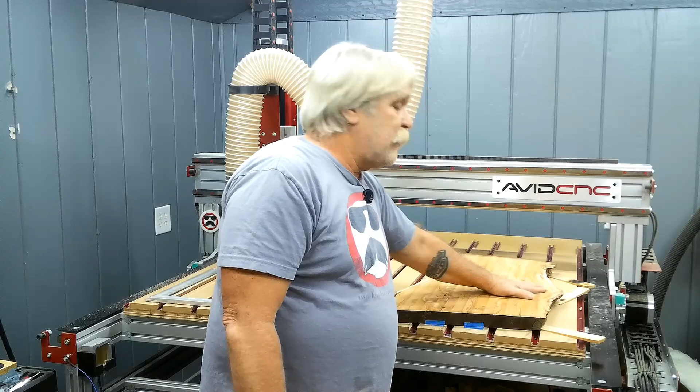Hey y'all! This video is part 2 of my mini-series on surfacing this Douglas Fir slab on my Avid 4848 Pro CNC router. In the last video, we flattened this side to get a nice even surface. And I did that manually using MDI commands and incremental jogging to get this surfaced nice and flat.

In this video, we're going to flip this piece over and we're going to create a toolpath to machine this slab down to its final thickness. We'll be creating two toolpaths. One will set to the material surface and the other will set to the machine bed.

Now, before I can go inside and start calculating the toolpath, I need to find out how thick this piece of material is right now, the way it's mounted to this spoilboard. Keep in mind that we used these shims to steady this piece of material as it had developed a cup in it. So I'll need to measure its thickness as it sits right now, then flip it over and mount it so I can machine it.

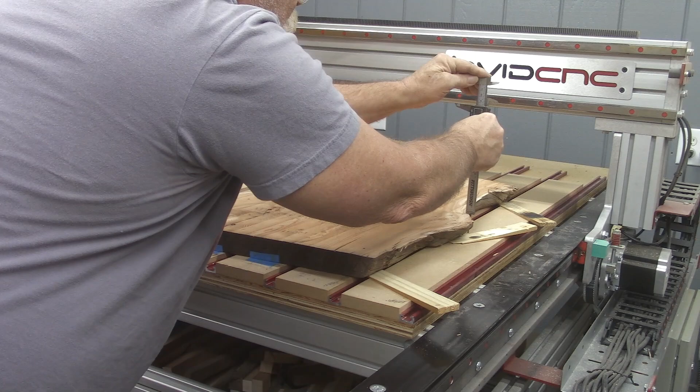Here in the software, we'll need to go ahead and create a new file. Now, before I do that, let me say that even though I'm demonstrating this in Aspire version 11.5, this works identically in Cut2D and VCarve, both desktop and Pro. So we'll go ahead and we'll create a new file. Now, I've already done this once before, so my measurements are already in my job setup form.

If you remember that slab, it has an odd shape to it. The widest part of that slab is 17.5 inches wide in X. However, because of that strange shape and some protrusions hanging out to either side of the slab, I'm going to go ahead and make it 19 inches wide. That way it'll cover the entire slab. It is almost but not quite 31 inches long, so I went ahead and entered 31 inches as the height in Y.

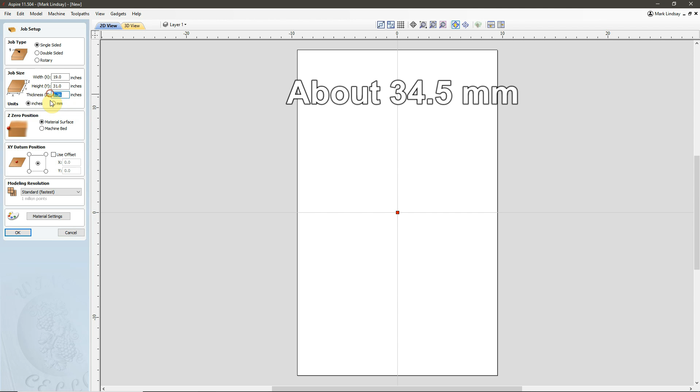For my thickness, after I flattened the first side, I took a measurement and I came up with 1.36 inches thick. So we'll enter that as our material thickness. For the Z0 position, I'm going to show you two ways of doing this, and I will use both toolpaths when we get out on the machine and I demonstrate this. For the first demonstration, I'm going to set my Z0 to the material surface. For the second demonstration, I'll set it for the machine bed. More on this in a couple of minutes.

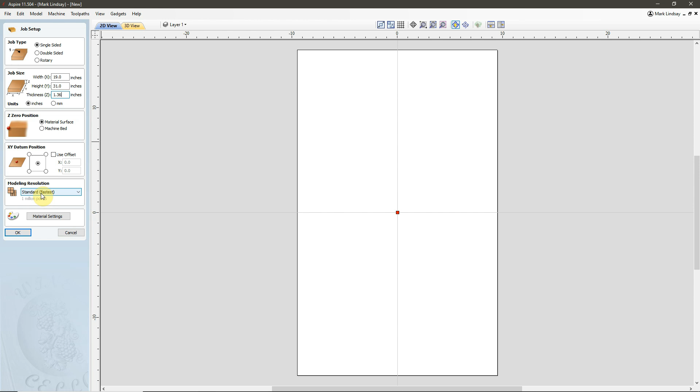I'm going to set my XY datum to the center of the material. Modeling resolution will stay at standard because there are no 3D components in this project at all. We'll click OK. Now, the first thing I'm going to want to do is create a vector that my toolpath is going to follow when we surface this material. So I'll come up here to draw a rectangle, and I want to use the center of this rectangle as my anchor point, and I want the center anchored to my X0, Y0, right here in the middle.

I want square corners, and for my width, I want the bit to come off about 1/2 inch from each side. So the way I'm going to determine the width of this rectangle is I'm going to come up here and highlight whatever value is in my X blank, and I'm going to type in X plus 1, which is the width of my material in X that I just put into job setup, plus 1 inch. And then I'll tap the equals button on my keyboard, and that gives me the width of my rectangle in X.

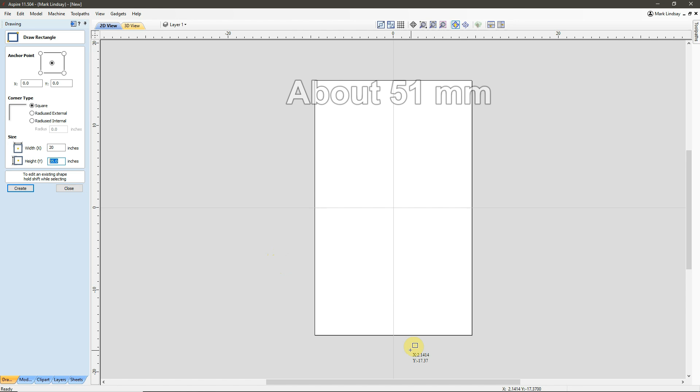For my height in Y, the material is just shy of 31 inches. Now, my surfacing bit has a 2-inch cutting diameter, and I want that bit to come off of the front edge of the material and off of the back edge of the material, the diameter of my bit, because I want all the X moves to happen out here off of the material. That leaves a smoother surface. So, for my height in Y, I'm going to say Y plus 4, because I want 2 inches up here and 2 inches down here. I'll click Create, and there is the vector that my toolpath is going to follow.

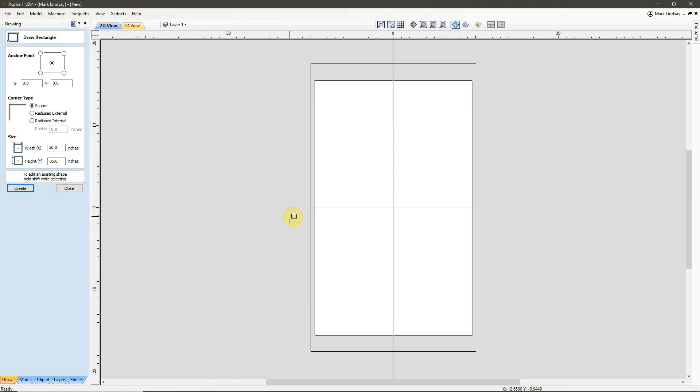I'll click Close. For this project, as I said, I'm going to show you 2 separate ways, so I'm going to create a second sheet identical to this one. For that, I'll come down here to my Sheets tab. If you have your tabs on the left side, the Sheets tab will be somewhere in this area. Now, a word about Sheets. Sheets were introduced in version 11.0. If you're using version 10.5 or earlier, you can't take advantage of Sheets. You will have to make a separate file for each one.

But because we have Sheets available to us, I'm going to create a new sheet. I'll just come down here and click Add New. And that has added a second sheet. And we can see here the name of the sheet is highlighted. The X measurements are identical, the Y measurements are identical, and the Z measurements are identical. For this second sheet, I'm going to use the machine bed as my Z0 position. So I'm going to go ahead and rename this now Machine Bed and hit Enter.

Then I'm going to come down and select Sheet 1, right-click, and I'm going to rename this Material Surface and hit Enter. Now I have 2 separate sheets that are identical in size.

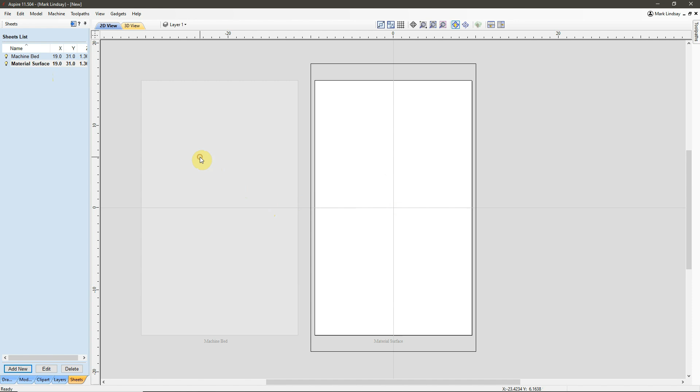Now that I have my machine bed material created, I'm going to come up here and select it so that it is active. Then I'll come down and I'll click Edit. And here I can make any changes up here should I need to, which I don't want to do in this case, but I'm going to set my Z0 position to the machine bed. And that will affect this sheet only.

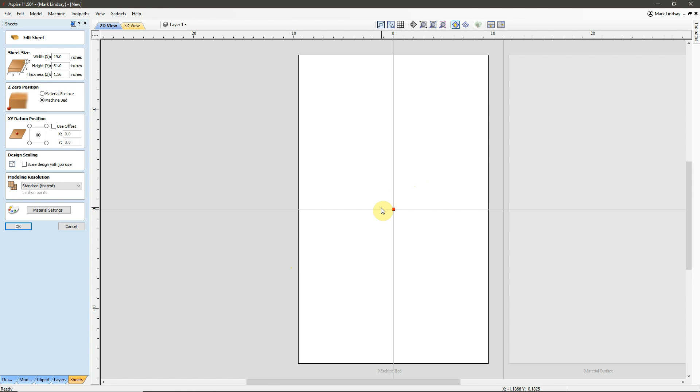Now again, if you're using version 10.5 or earlier, you can't take advantage of this. You will have to make a separate file. I'll click OK. And we now have our 2 sheets. One with the Z0 position set at the machine bed, and the other with the Z0 position set at the material surface. Now I'm going to come back over to my Drawing tab.

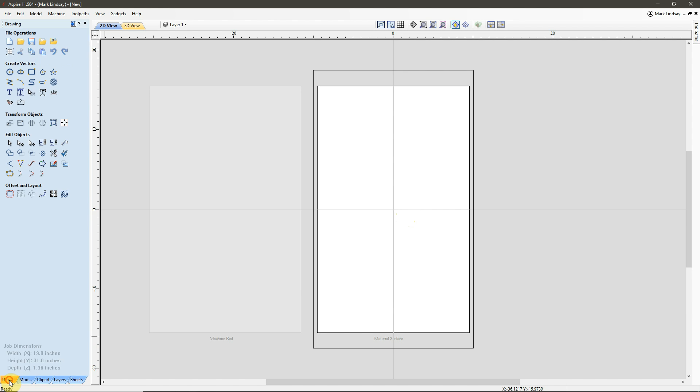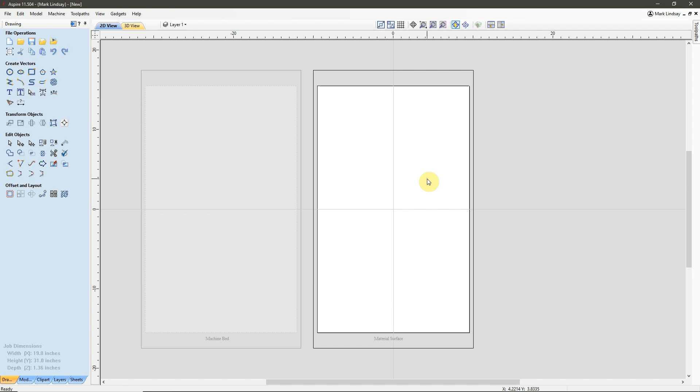I'm going to select this outside vector that we just created. Then I'll right-click, Copy to Sheet, Machine Bed. So now I have the same vector on both sheets. We're ready to calculate the toolpath. We'll head over to the Toolpath tab. I'll select the vector, and I want to select a pocket toolpath. So we'll come up here to Pocket.

Follow me on this. It's going to sound counterintuitive, but I will demonstrate what I'm doing when we get outside on the CNC router. For my start depth, for the material surface sheet, I'll enter 0. For a cut depth, I'll enter 0. I'm using my 2-inch Amana RC2255 bit. I want to use a raster machining strategy.

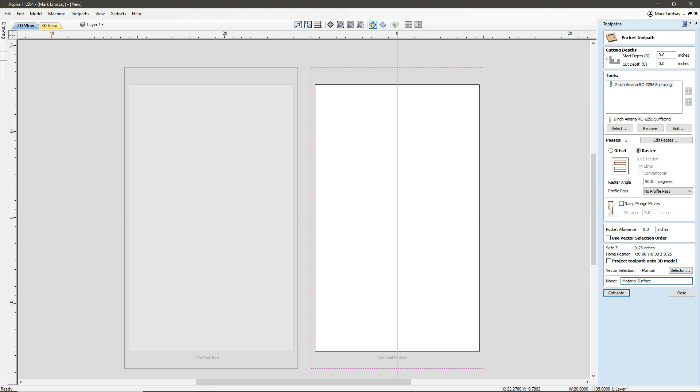If I just use a raster angle of 0, the bit's going to go back and forth from side to side along the X. I prefer to machine bottom to top, top to bottom along the Y. I have a raster angle of 90 degrees set. I also have my profile pass set to no profile pass. Now I'll come down here and name this Material Surface and calculate.

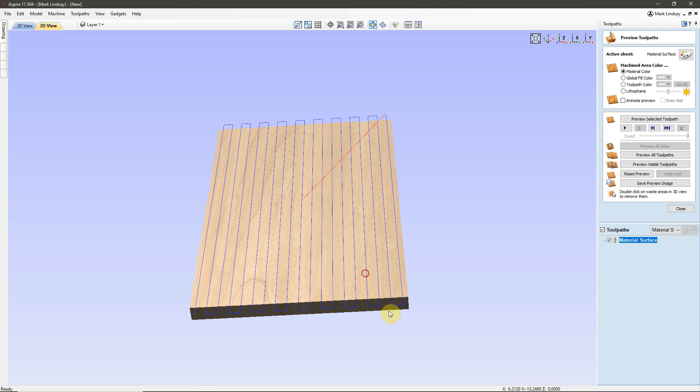Now, if we take a look, we'll see the bit will come from my XY0 up to this corner, then plunge down to the material surface, and then start moving back and forth, making its X moves out here off of the material, which is exactly what I want. I'm not going to preview it simply because you wouldn't see anything. All you would see is an animated preview of the tool moving back and forth. So I'm not going to bother previewing.

I'll just close this. And now I'm going to save this toolpath. So we'll come up here to save toolpath. And I'll save this visible toolpath to one file. Here's my bit. Here is the machine I'm using. Here is my post processor. I'll go ahead and save the toolpath.

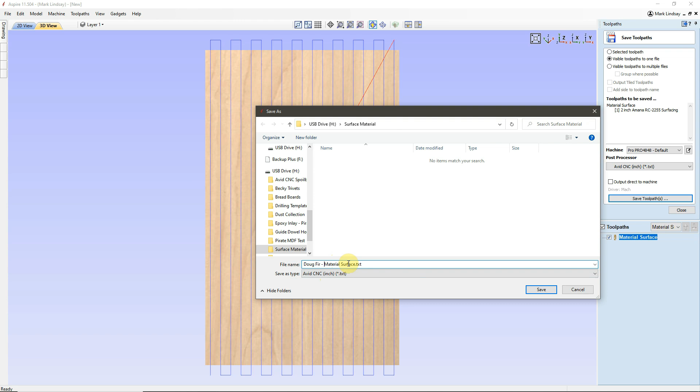I have my thumb drive installed in my computer, and what I'm going to do is rename this file. I'm going to call it Doug Fir Material Surface. That's letting me know that my Z0 position is the material surface. Then I'll click Save. So that one toolpath is finished.

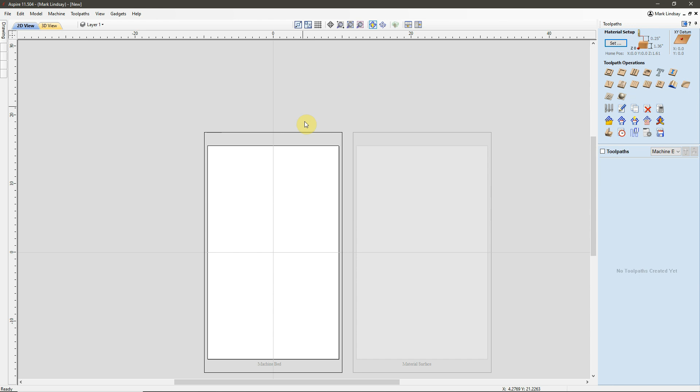We're done. Now I can uncheck it, close this, and now I can switch over to my other sheet, which is the machine bed. Out here in the 2D view, the machine bed sheet is active. I will select the vector, and I'll do the same thing. I'll come up here to the pocket toolpath. Now for this toolpath, I am going to need a cut depth. And I'm going to go slowly through this so you can follow the logic on how this is done.

My material thickness is approximately 1.36 inches. What I want is I want to end up with a thickness of about 1 1/8 inches, which is 1.125 inches. As we saw outside, the surface that I'm going to be machining with this toolpath is not flat. So that's about the thickest I think I'm going to be able to get out of this. It may end up being a little more, it may end up being a little bit less.

But the way I'm going to figure out my cut depth is I'm going to take what I believe to be the material thickness now. I'm going to enter 1.36. From here, I want to subtract the final thickness I want. So I'll subtract 1.125. Then I'll tap the equals button. And that gives me a cut depth of 0.235 inches. Take your actual thickness, subtract the final thickness you want, then tap equals. That is your cut depth.

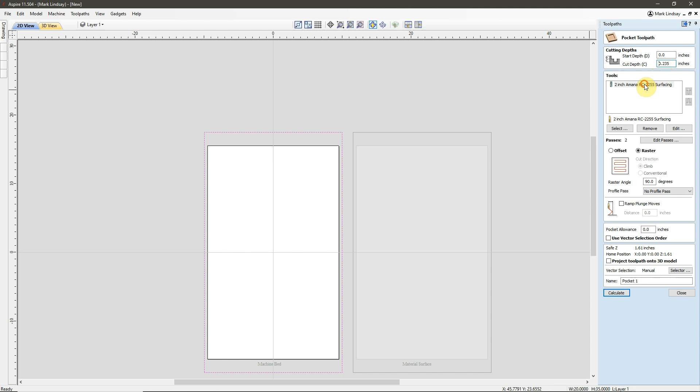Again, I'm using my Amana RC2255 surfacing bit. And the settings for this bit, if we come in here and take a look, the pass depth, as suggested by Amana, is 1/8 of an inch. I know that this tool is capable of cutting that depth with no issue. I also know that my machine is capable of cutting that depth with no issue.

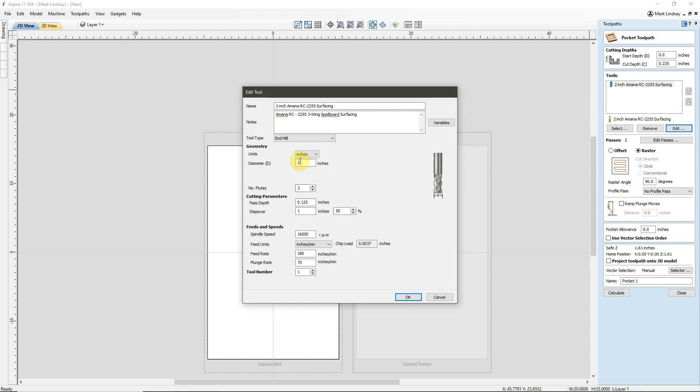But I want to be just a little bit gentler with this toolpath, because it's not a nice, flat, even surface with no defects. There are knots, there are surface defects that could get knocked loose and become a projectile if I try to be really aggressive with this.

So, as it sits right now, it's close enough to 1/4 of an inch of material I'm going to be removing. The software is setting this for 2 passes. Again, I don't want to be that aggressive. So I'm going to come over here and edit passes. And we can see it wants to take not quite 1/8 of an inch off per pass, but I want to reduce that. So I'll hit 3.

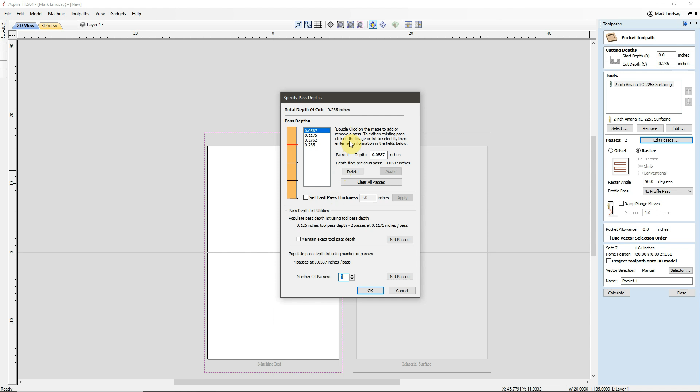Now I'll increase it to 4 passes. So it's going to be a little bit more gentle. Now, each pass isn't going to take very long, but I'll be able to kind of keep an eye on it and make sure nothing comes dislodged or I'm not shredding the edges off of this piece of material. I'll click OK, and we now see it's going to do this in 4 passes.

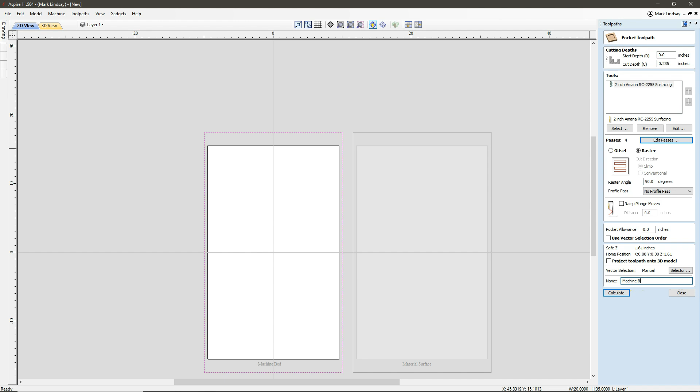Again, I'm going to use a raster machining strategy with a raster angle of 90 degrees with no profile pass. Now I'll come down here and I will name this machine bed, and I'll calculate the toolpath. Now I can go ahead and preview this, and we'll do that right now.

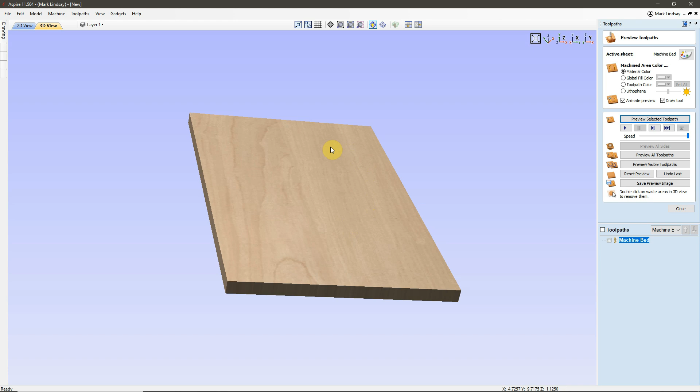With our toolpath complete, we can come over here and put our cursor over the surface. And if you look down here at the digital readouts that are going to pop up, you can see that our Z height is 1.125. And that's exactly what we want. Now, this is a theoretical Z height. It's going to depend on how we mount our material, as well as a couple of other factors.

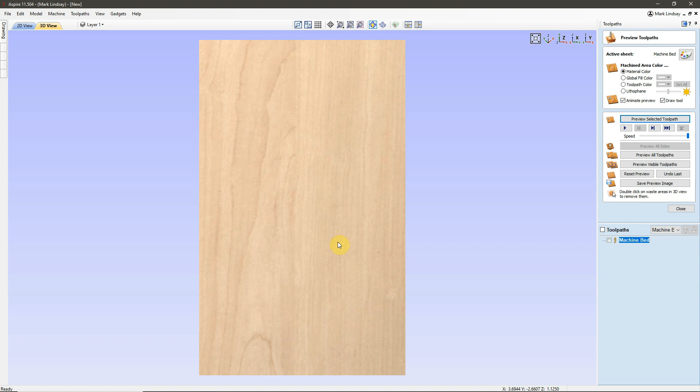Now, I'm not looking for spot-on laser precision here. I'm looking for as close to that 1.125 as I can get. It is not critical, but I'd like to get as close to that as I can. Now, our preview is done. We can go ahead and reset it. And I can close this. Now I can save this toolpath.

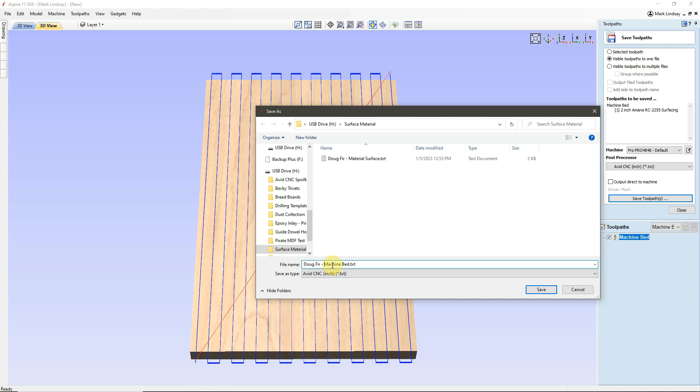So we'll go ahead and select it to make it visible. I'll click Save Toolpath. Again, visible toolpath to one file using this bit. I have the correct machine, the correct post processor, and I'll save the toolpath. I'm going to go to the same folder on my thumb drive, and I'm going to again change the name to Doug Fir Machine Bed, letting me know that this toolpath, the Z0 position, is the machine bed. And I'll save it. Go ahead and close this and deselect.

Now I'm ready to take my thumb drive out of the computer and take it outside, and we'll get on the machine and we'll start surfacing this Douglas Fir slab.